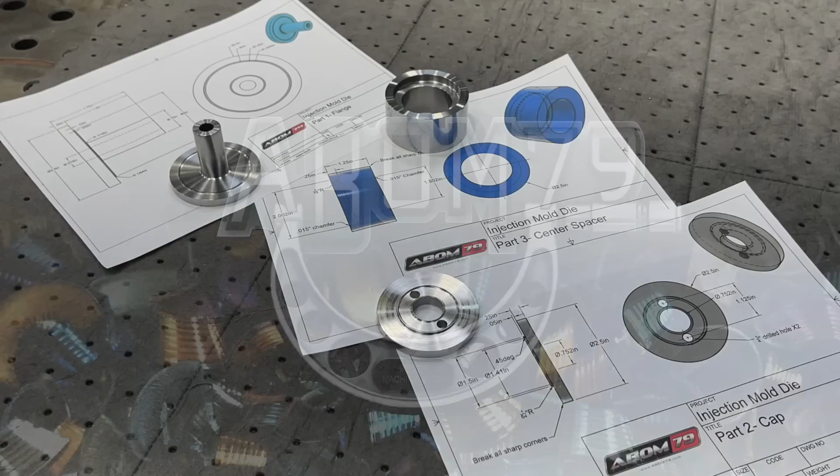Now that we have our first flange and stem piece for our first part completed, we'll move on to the second part, which is going to be the center spacer. I've got it listed as part 3, but it's just the next one in line I'm going to work on. This one will be fairly simple.

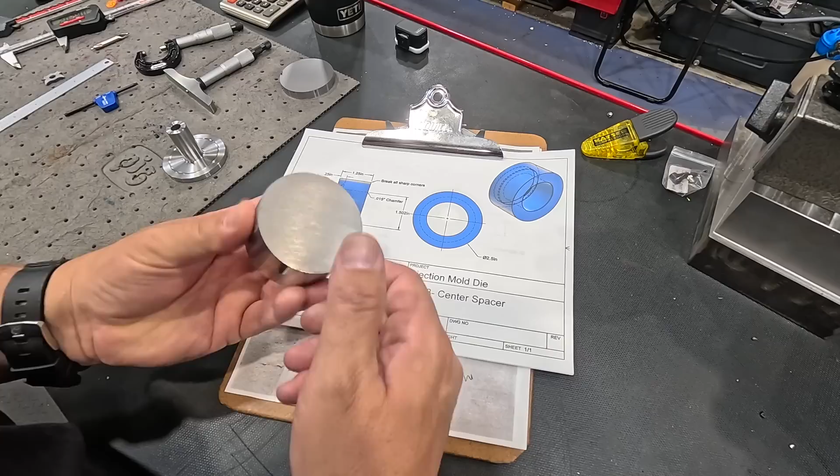We'll chuck it up in the 3-jaw, face it, drill it, counterbore it, and once we get all that finished, we'll flip it around, make sure it's trued up nice, face it to the correct length, and remove all the sharp edges.

All right, let's get this one machined now. We'll start by facing one side off. That's about 100 thousandths oversized, so we'll just touch off and take 50 thou. I'm going to go up to 900. There we go. 50 thou is always a good round face cut when you're trying to remove some material, at a 10 thou feed rate.

Now we'll go ahead and get our hole drilled through there. And now we'll knock that corner off while our tool post is where it's at, get rid of that sharp edge.

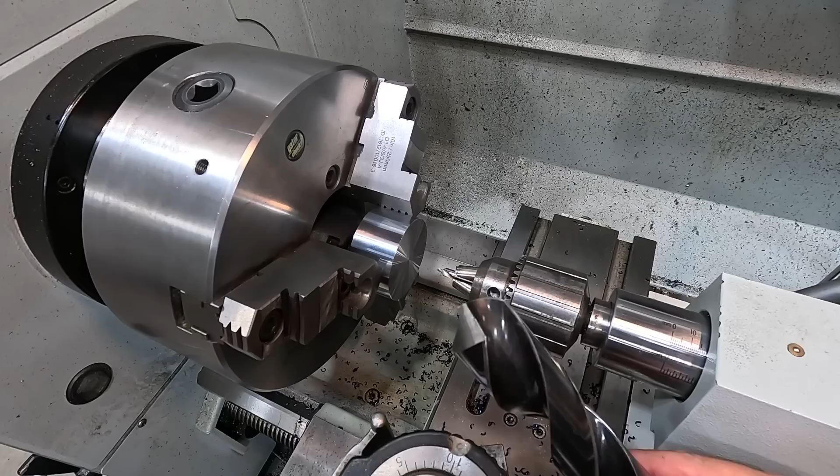For our drilling, we'll start with a center drill just to spot it, and then we're going to go in with a 1/2 inch split point drill. Then we'll follow in there with this 1 1/4 inch taper shank, put a 1 1/4 inch hole in there, and then we'll just bore it to our 1 1/2 inch size.

I think I'll go ahead and use our flood coolant for the drilling op, just to keep everything nice and cool and keep the cutting tools cool as well.

All right, let's see if we can do this without making a huge mess. That's one of the reasons why I don't always like using coolant over here on the lathe, but for drilling ops it's perfect, as long as you're not spinning the chuck too fast. I got it set at 340. See, even that is trying to sling it, and it gets all over the floor and the toolbox over here.

Let's see what we can do with that. I don't want to go any slower than that.

Drill's cutting beautifully, even on both sides. It just wants to make a mess. And it's over here on my print, dang it. Just use flood coolant, they say.

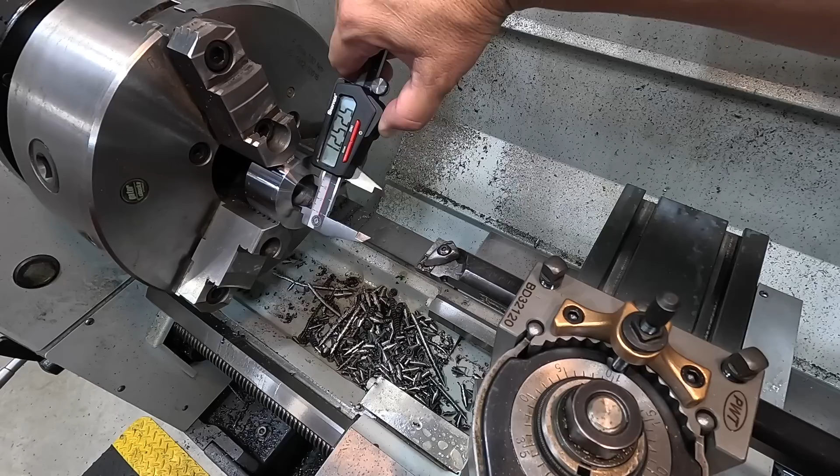All right, we got us a boring bar set up. Let's see what our hole size ended up being. I cut very true, look at that, 1.252, 253-ish. Nice, so we're going to bore that to 1.502.

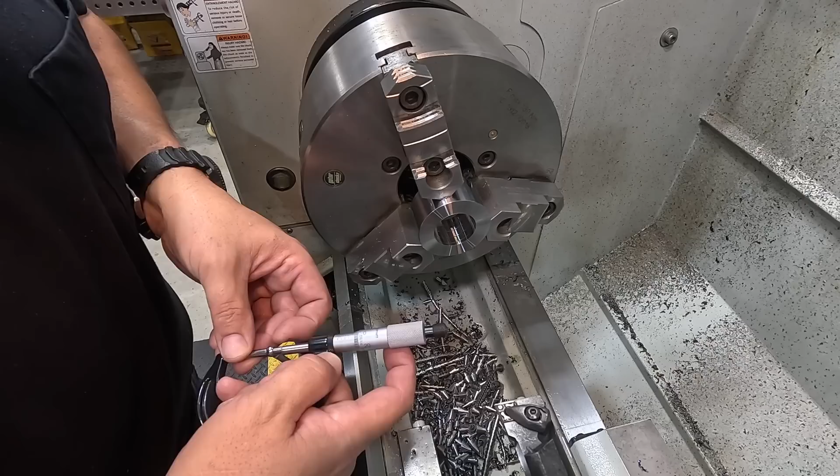Let's see if we're around 1 inch 452. 1 inch 450 and a half. All right, so we've got about 51 thousandths to come out of that.

So that should have been our finish pass. We got a nice finish in there. We sped that up to 900 RPM and ran a 5 thousandths feed rate on that. Let's go ahead and get us a measurement using our telescoping gauge. The target is 1.502, and let's see what we hit here.

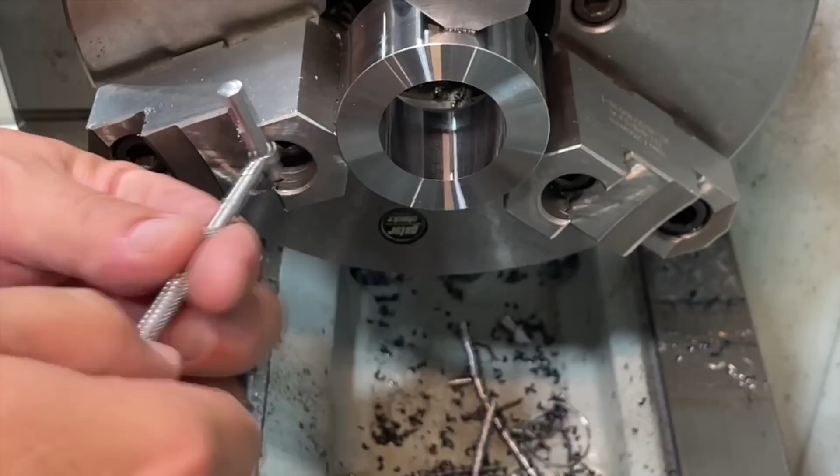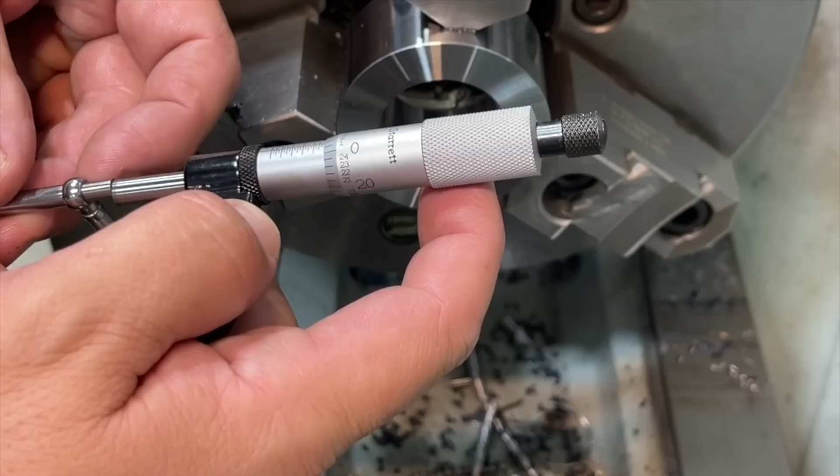All right, 1.501 and 5/10... .501 and a half. So I'm a half thousandth smaller than my target size, and there's nothing wrong with that. A half thousandths tolerance is well within the line of what we're shooting for here. So our bore is finished.

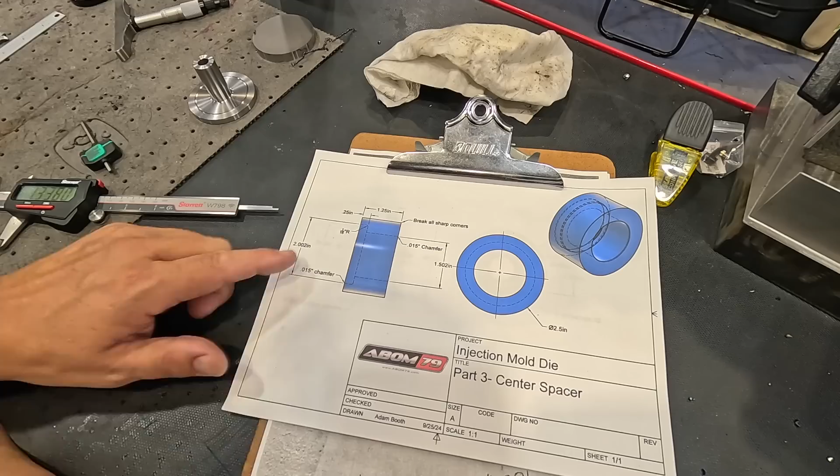Now we just need to do our counterbore. You can see we have a depth of 0.25, so a quarter inch deep, and a diameter of 2 inches and 2 thousandths. That is what's going to line up here on this little registered fit that we put on the first part, to line those two up together and make them fit good. So we want to try to hit our target there, 2 inches 2 thousandths, and the depth of 250 we'll be able to do no problem. So let's get that machined. Another really good use of our carriage indicator right here.

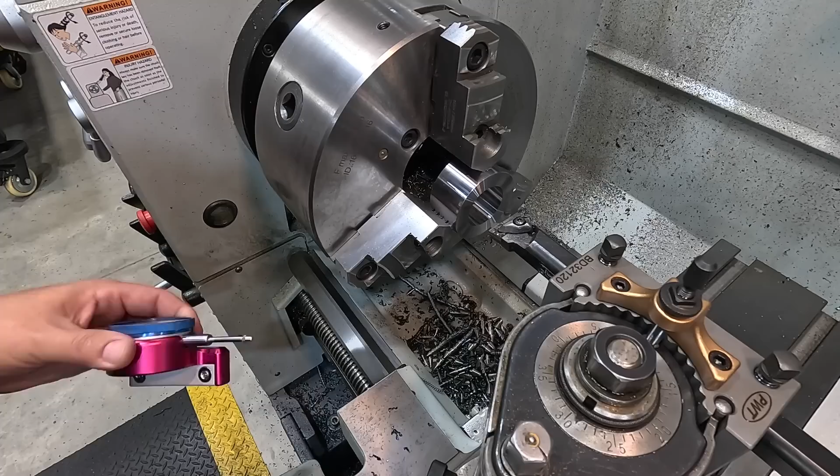You guys can pick these up from Edge Technology. You got some magnets, and when you stick them on the ways there, it keeps the stem of the indicator parallel in line with the travel.

And what we'll do is just set our stop there. So let's come on up with our boring bar. I'm going to get myself really close and just very lightly touch the tool to the face, and I'm going to set a 0 on my Z-axis DRO.

Now I want to come up. I can see how close I am. Just touching there.

And now we can go ahead and I'll just re-zero our DRO. We're going to go in there 240 thousandths, and then we're going to set this guy to our first 0. And the way it's clocked, I like it to come on around to about the 3 o'clock position.

You need to give yourself a little bit of run-in time, so when you see that needle start to move, you're not hurrying to stop it immediately. You want to be able to watch it come around to your 0. That gives us 10 thousandths to clean off that back face there.

It also allows you, so as this is coming up and feeding and you're approaching your 0, maybe you don't hit the lever just in the nick of time and you might go past it a little bit. That happens, it's very common that you might go past it a few thou. So that gives us 10 thousandths to clean that face up.

All right, so with that, I think we're ready to cut it. So I'm going to come in here and touch my bore, just go ahead and touch it right there, and I'm going to go ahead and zero out my X on the DRO and just start from a 0 point there.

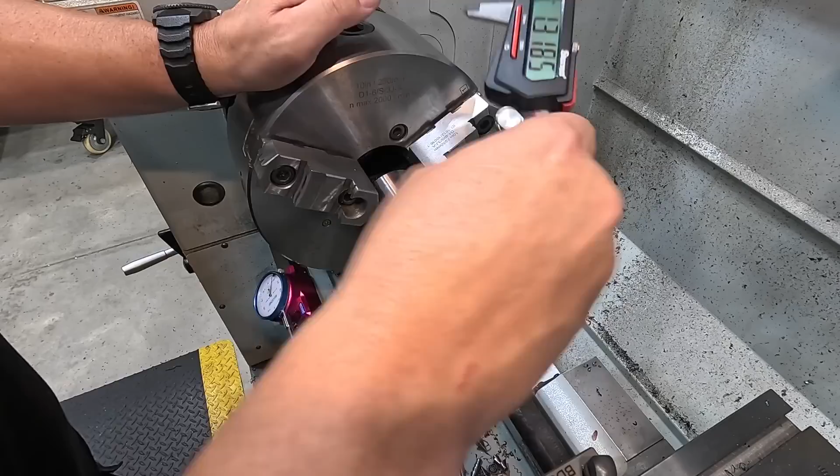So what I'll go ahead and do is finish doing what we're doing here and get our bore finished and get our radius machined in there, and then I can just face this off to the proper depth of 250 thou, and then that'll still give us enough room once we flip this around to just skin that other face clean. So I'm going to go ahead and swap this insert out.

What we're going to do is we're going to remove this insert here, which is a 431, and we're going to go in with a Walter insert, a 433 size. So that is about a 16th corner radius on the insert. It's a little smaller than what we actually have on our print, but we're going to use this because this is going to be fine for the radius that we want to put in that corner.

That'll be so whenever this is molded, the bushing, this corner right here on this insert will actually be the corner of the flange that gets molded in there, and that's going to work pretty good for that.

I'm going to go ahead and get that extra facing material out of there now. Not going to have good chip control with this big nosed insert.

All right, there we go. That's going to be our back face that we're going to go up to.

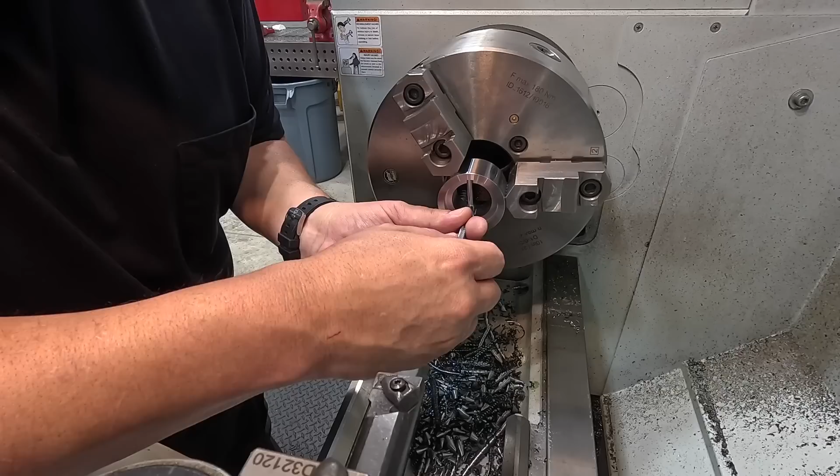I am going to use a telescope gauge here to check this. We have just enough material that we can get a good contact on both of the tips, and we should have about 7 or 8 thousandths, I believe, to come out of this. 996, so that's 5, 6 thousandths. I'm going to go ahead and double check that.

It's really easy to get it wrong. If you move that telescope gauge too much and don't stay dead top dead center, you need to have resistance whenever you come out of it so that it straightens itself up. I'll come back in here and check this again. Getting the same thing. 996 thousandths, 5 to 6 thousandths is what we want.

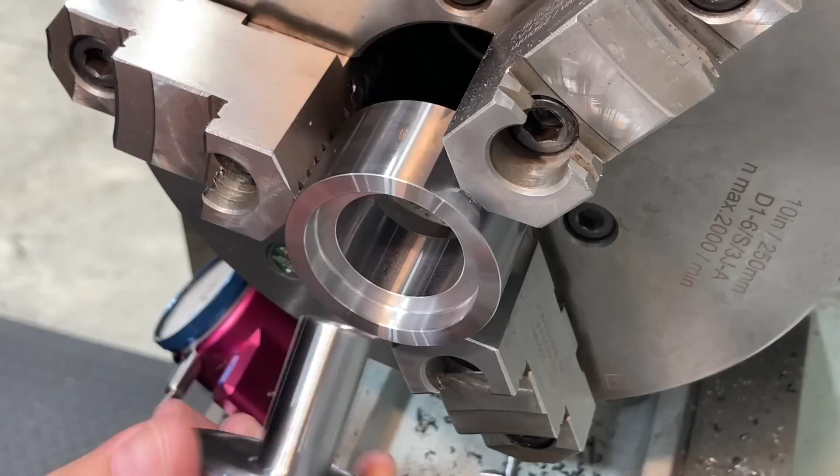I wanted just enough chamfer on that corner to clear the radius inside this little registered fit there, so it would seat all the way up to the face, and that's what we got. I can feel that couple thou clearance in there, and we have a good fit.

Once again, I was jumping ahead of myself here because I knew that I needed to face this off, but we chamfered it anyway. So we're going to have to come back and chamfer it because I need to take a little bit off of that. So we've got our depth mic here, and I'm just going to go ahead and get a read on it.

So we want this to be 250 thou. So right now, let's see, where's 250? There's 250. So there's 25 thou, 30, 35, 36, 37. So we need to take about 37 thousandths off of that face right now.

Just going to go ahead and work through this. Touching the face there, get a 0 up there. Let's get a 0 on our dial indicator. We'll just go ahead and take 25.

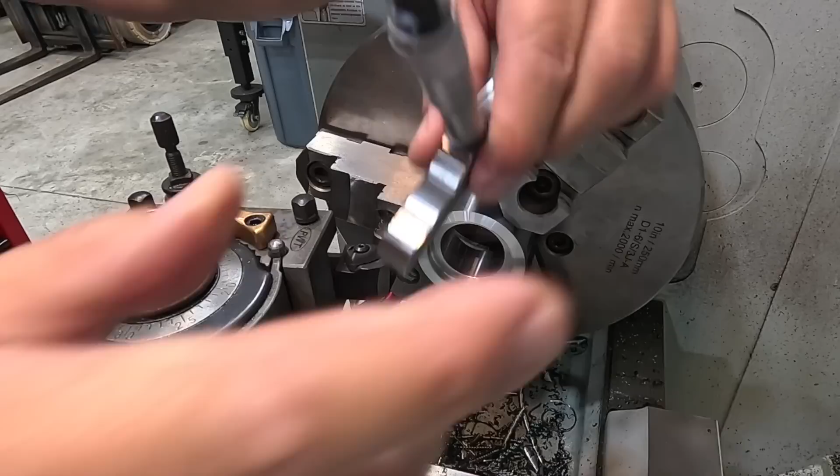Leave the tool right where it's at. Let's take another measurement and then take a finished cut. Get rid of those chips.

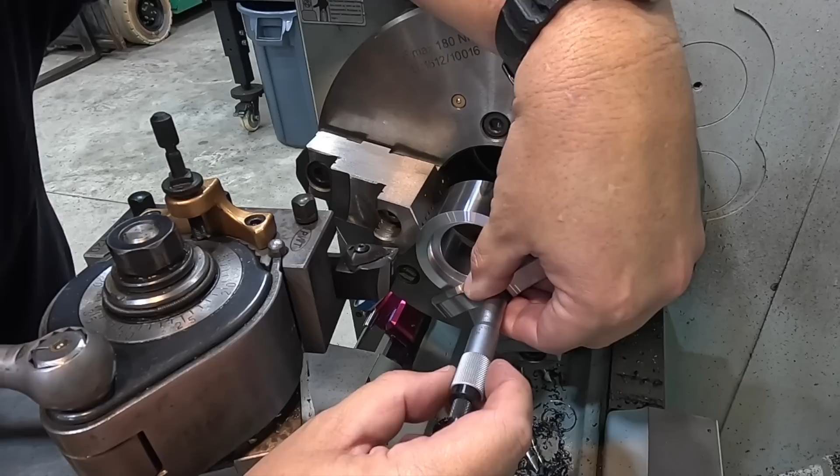It's about 14 and a half is where it's touching. 14 and a half. Okay, looking down here on this dial. 5, 10, 14 and a half. Let's see if that's it.

Again, let's just leave our tool right there. I don't want to drag it across the face, but I want to check this before we move it and see if we hit our target. I think we did. It's probably going to be just a little bit of material rolled over from that facing cut.

And we are 0.5 thousandths off of our depth right there, so we're going to leave it right where it's at. There's nothing wrong with that. And I'm going to go ahead and just re-chamfer that inside corner.

Already chamfered that inside. We're going to go ahead and hit this outside corner, break that sharp edge off of it, just like that. And what I'd like to do is take my Scotch-Brite.

Let's give it a nice little hit with some of this right here, just kind of polish it up. It always softens the edges and then makes the surface finish look a little more smooth and bright.

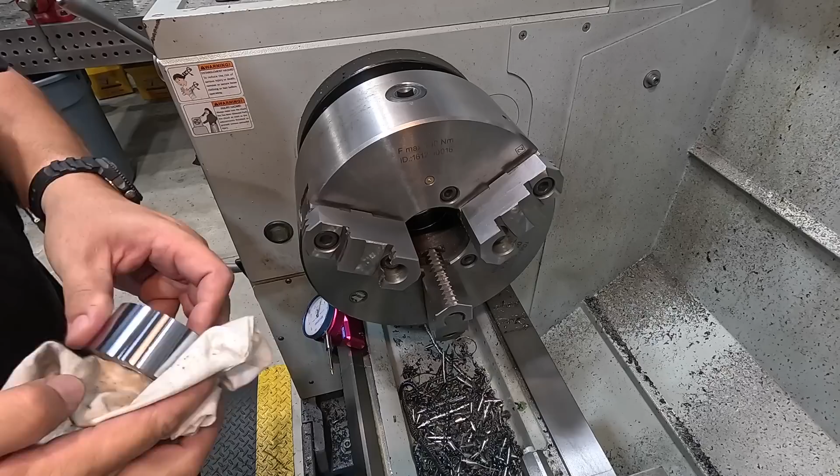See if we can get it in here and get us another measurement. Looks like 13, do it one more time. 13 thousandths, that's what we need.

Too much surface speed, not enough depth of cut. That's why it tried to roll that chip around. Luckily it did not scratch it, because that was my finished pass, but that's usually when it wants to do that, right? On your finished pass, not on the roughing passes.

Looks like we hit 250 on the nose. Nice. 250, all right, that is good to go. Only thing left now is that we need to put our chamfers on there. We just want to kind of break the outside, just kind of matching the other side. That looks good. And then we'll swap our tool and do the inside.

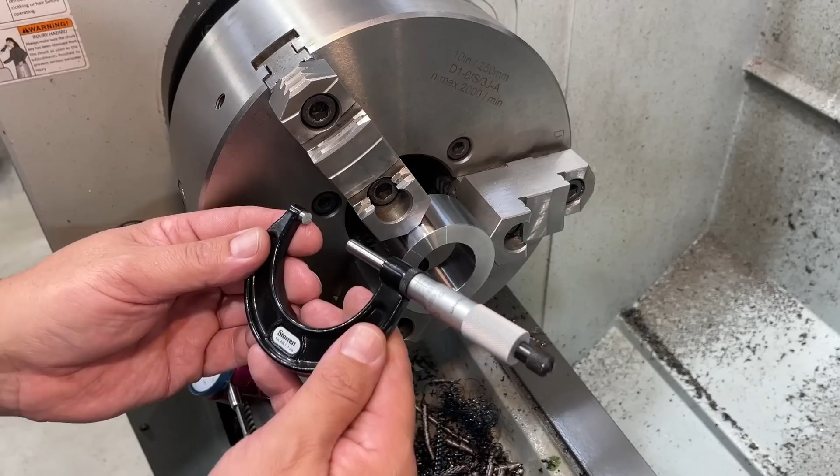All right, this guy is finished up. Let's get it out of the lathe.

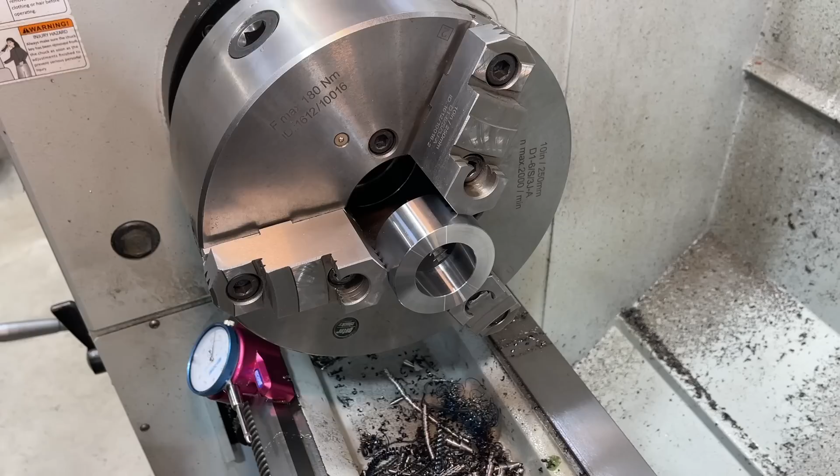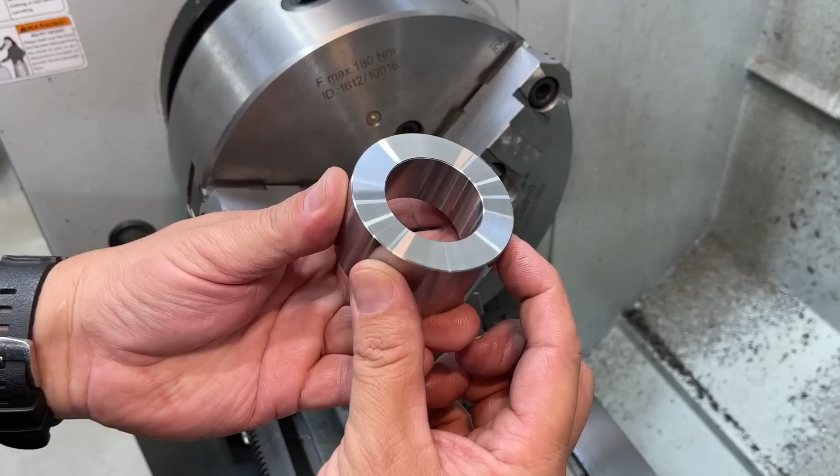Okay, so we've got the first and second pieces finished right there. Everything's turning out real nice, so now we have our third and final piece that we got to machine, and that's going to be the cap.

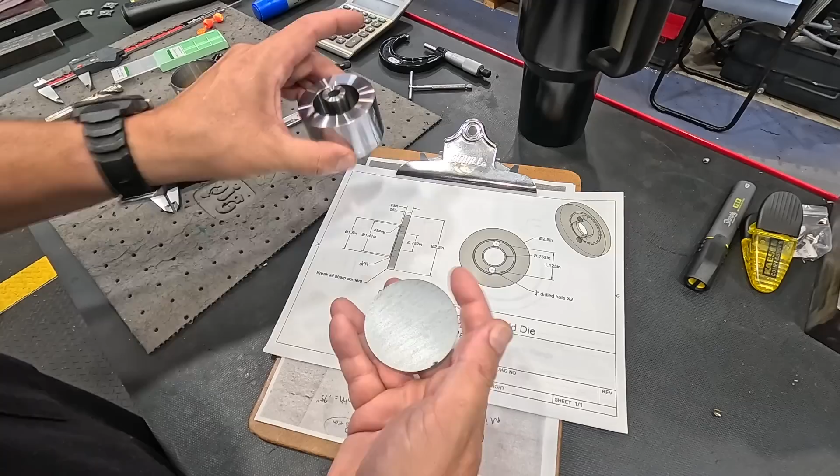So we'll take this disc over there and go ahead and start on it. This one's going to be fairly simple too. I think the trickiest part really is going to be just lining it up, which ain't going to be a problem. And one side has that registered fit so that it'll line up down inside this bore here. In the center of it is bored 0.752, giving about 2 thou clearance over this stem coming through there. We'll have a couple holes drilled in there as well. So once we're through the lathe work, we'll have to go to the mill and put a couple holes in it. So let's get back over on the lathe and get started on this guy now.

All right, so there's a few ways that you can put a thin disc in the chuck here and get it to run true. I think the trick that I'm gonna try here is to just get lucky, really. Usually when you have a good piece of material like this chrome plated rod, it's pretty true on the outside. So a lot of times you can actually feel the material squaring up on two of the jaws and just kind of hold it against those two and then snug it down. You can also, sometimes it might move a little bit when you go to chuck it because you're kind of pulling it one way or the other. If you just unchuck it and then let it settle on those two jaws, it'll kind of square itself back up. And we'll go ahead and snug it up.

Let's see how it's running. That's running perfectly true enough that we can get in here easily and face that guy, no problem at all. So we got lucky then, but we do need to make sure that it's tight because I didn't fully snug that up. So let's go back to our chuck and just go ahead and make sure all three pinions are snug. All right, and then we are ready to roll.

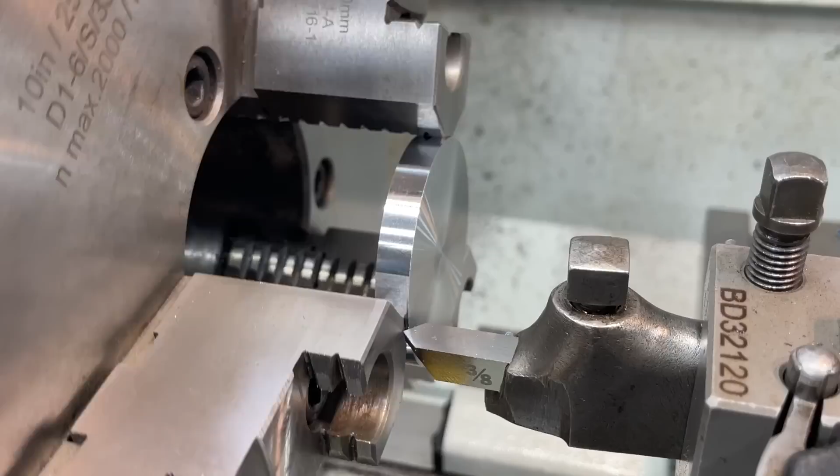So that material actually burned up the high speed, so I put a carbide tool in there. We're just cutting a chamfer on this. There we go.

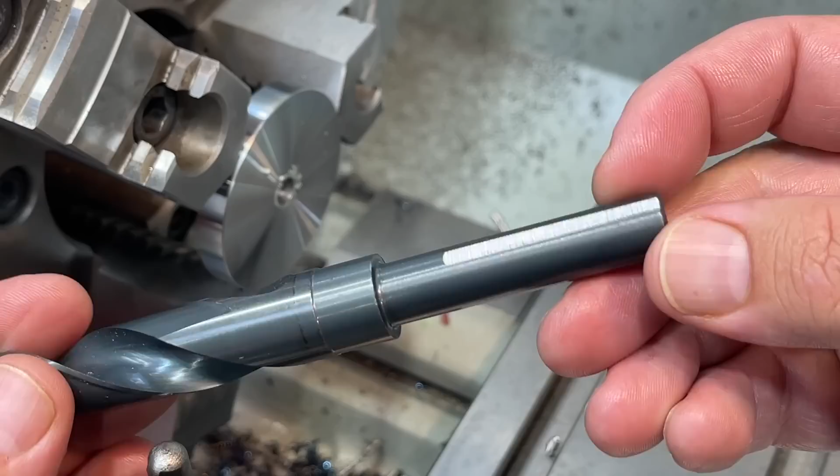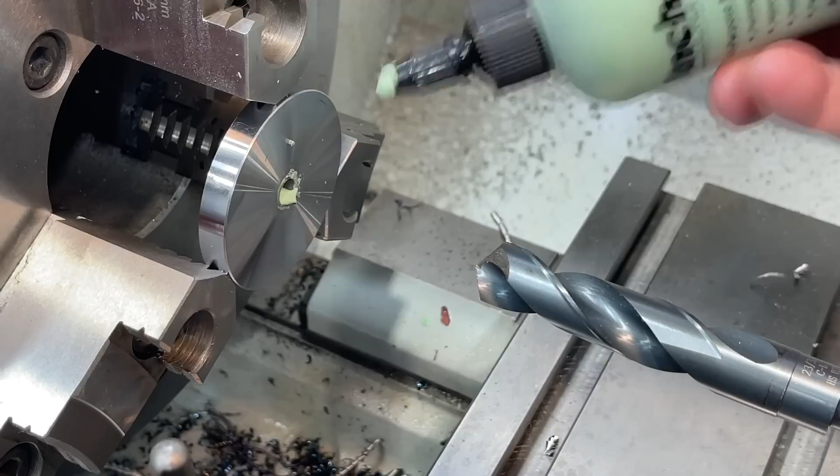So we got to make a 3/4 bore through there. We're going to drill it and then bore it to size. So we're going to go in there with this 23/32, this is my Chicago Latrobe. This one is still new. Should cut nice, it's got the 3 flats on it, so we ain't got to worry about it spinning. So we'll get this through there, and then we'll put up a little boring bar and get it bored to size. Using some of our anchor lube here for the little bit of drilling that we got to do. Put a little bit in the hole, a little bit on the drill here.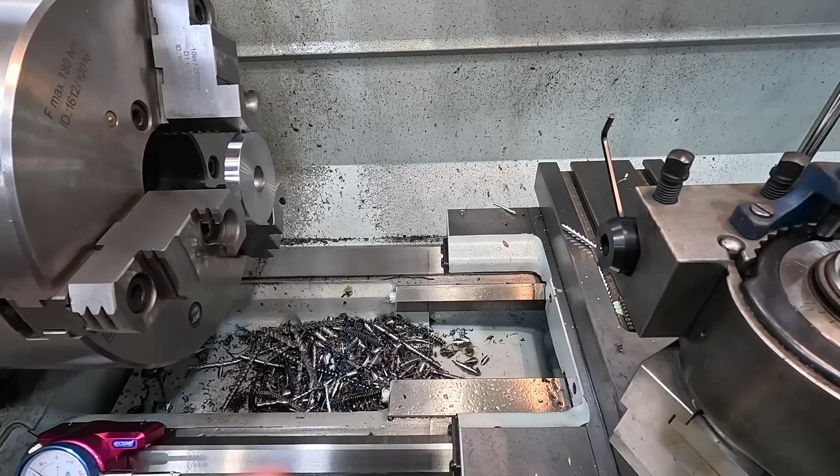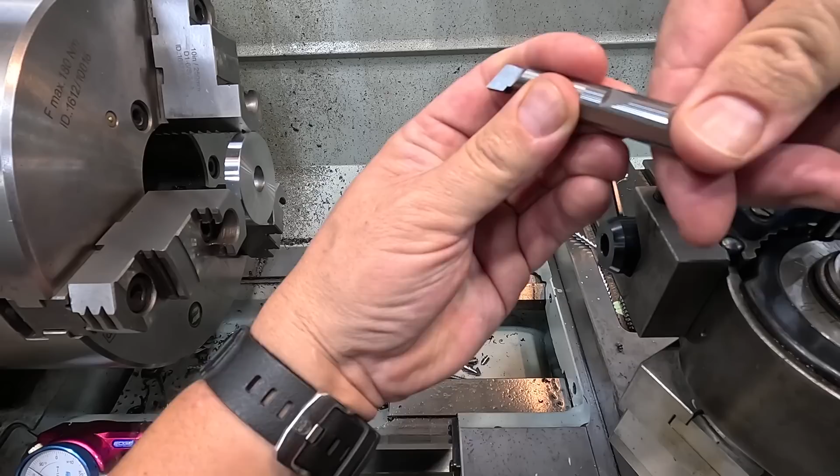I'm going to use my Micro 100 Micro Quick boring bar here to bore that to size. I love these little tools because the way they've got these made, you've got that angle ground on the back. Inside the holder, there's a pin that squares it up. So really all you have to do, you can see that notch on the top of it, is install it. If you get it straight, it's a very precision fit. You stick it in there and that pin is actually going to square up the end of the tool right where it should be. And you just tighten up that set screw, that's a conical shaped set screw that just locks it in and keeps it pushed back.

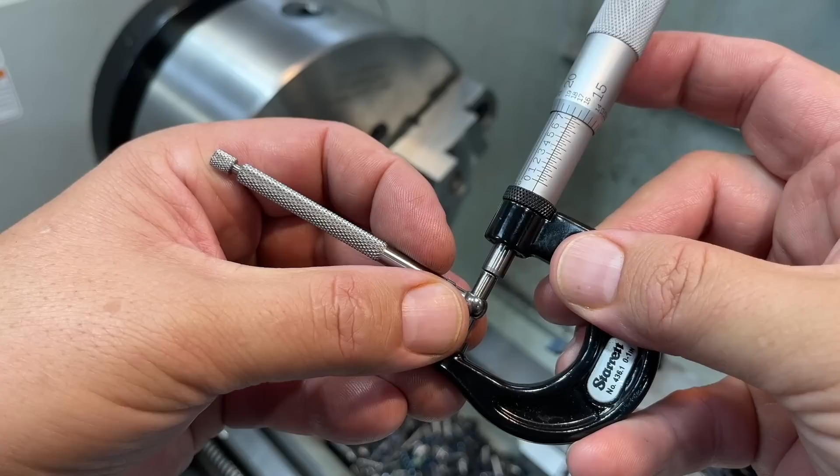Got 10 thousandths to come out of there. I just took 5 thousandths because I'm going to go ahead and mic that again and we'll make a finish cut.

Get a measurement, see what we landed on. That's looking really good. 752, maybe a tenth over. That's nice.

All right, so tell you what we'll do. We got our part, that's where it's gonna fit over. Let's check it. Yep, nice close fit on that, just like it needs to be. Nice, chamfer on that side will be finished up.

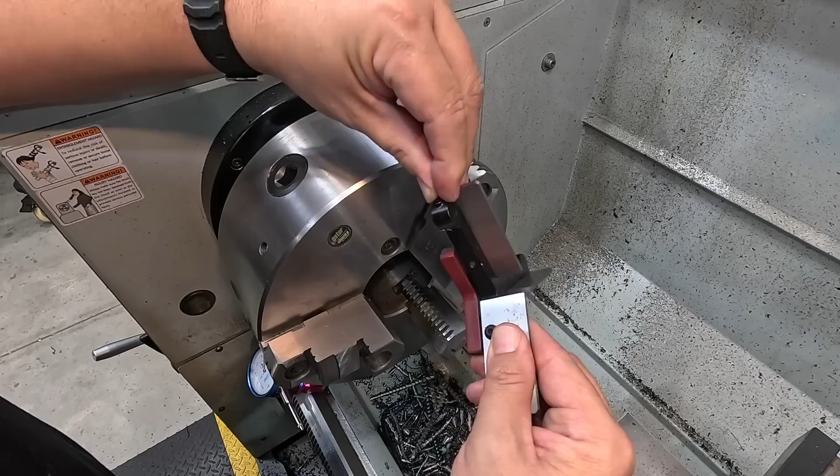And all they are is 3 parallels that's bolted to the spider, and they got some magnets back here. This is just a spacer to keep it centered in the chuck. And these are 1 1/8 inch tall. You can stick these guys on here like that.

Now the problem is that these aren't actually tall enough. And I have a set of the parallels, the tallest ones you can get is this guy right here. Let me see, 1 3/8 - I think that's - I'm sorry, 1 5/8.

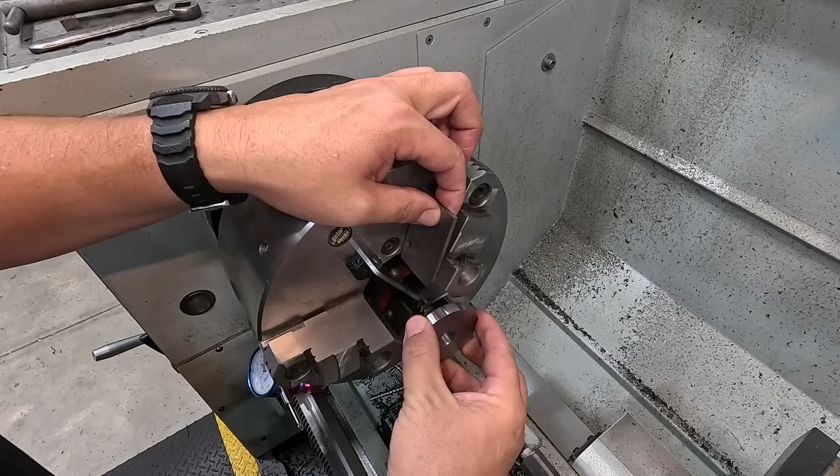So you can bolt that on there, but you see, we really only have a little bit that we need the chuck on because we need to face this to our proper thickness. And even going with the thickest parallel, it's still going to be up in there, so that's not working real well. So what we'll do is just find some parallels, or maybe even a 1-2-3 block or something. I need to get something in here that's going to shim it off of these parallels out to about right there. We really only want one notch of the 3 jaws to hold that, so we can get it faced off.

So where's my rule at? Let me get a measurement. I'm thinking one of my magnetic shim blocks from the Fireball. Yeah, so I think 1 inch will probably work to shim that out. So we'll try that. We'll put our little magnetic blocks here and see if we can push it up against it.

There we go, this is what I was looking for right here. And we could actually go in there a little bit further, but I think this is going to work right here. So let's go ahead and push that in.

And tighten up our chuck jaw. I wasn't on the pinion I wanted there. So that's got a good feel to it. It should be good to go.

We'll go ahead and pull these guys out, we're not going to leave them in there. This is going to stay in there, we can't get it out, but the magnets will hold it in place. So let's give this guy a spin up and see what we got.

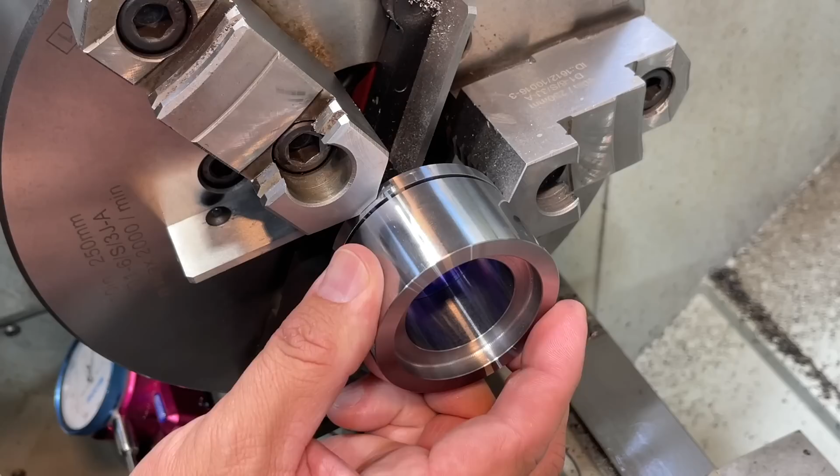So that fit right there is what lines up inside this piece. Got a good fit on that. So it should have about 2 thousandths clearance over that bore there.

So we're on to our last step here for our flange piece, and it's going to be very similar to what we did right here. We're going to use this 1/8 wide full radius insert, and we're going to plunge in 35 thousandths, and all I'm going to do is blend or cut all the way up right to the edge of both the bore and this registered step right there. But it's going to be just like what we did on our very first piece.

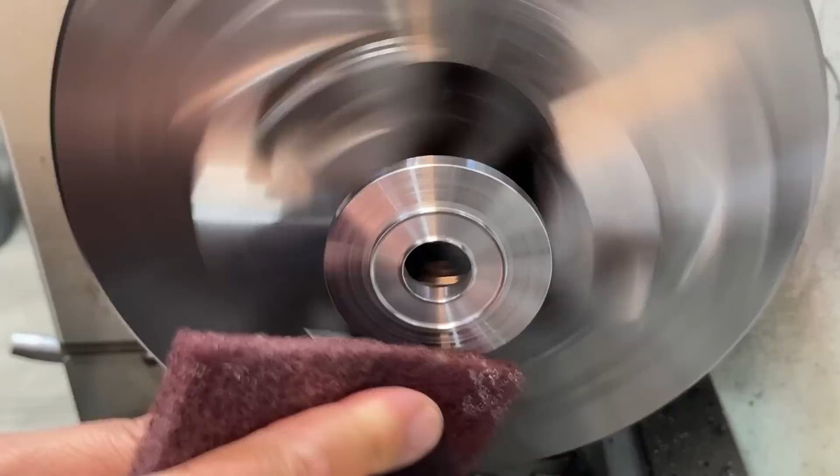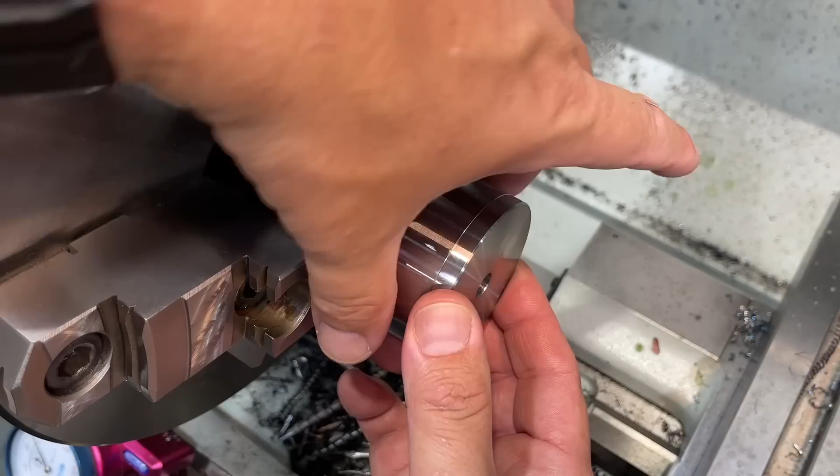Okay, we have all this polished up nicely, nice and soft, smooth, no sharp edges. All right, there is our flange piece. Here's our center bushing, sleeve. Fits on there nicely. There we go, look at that. Beautiful.

Our machine work in the lathe is wrapped up now. We'll go ahead and get it out of the chuck.

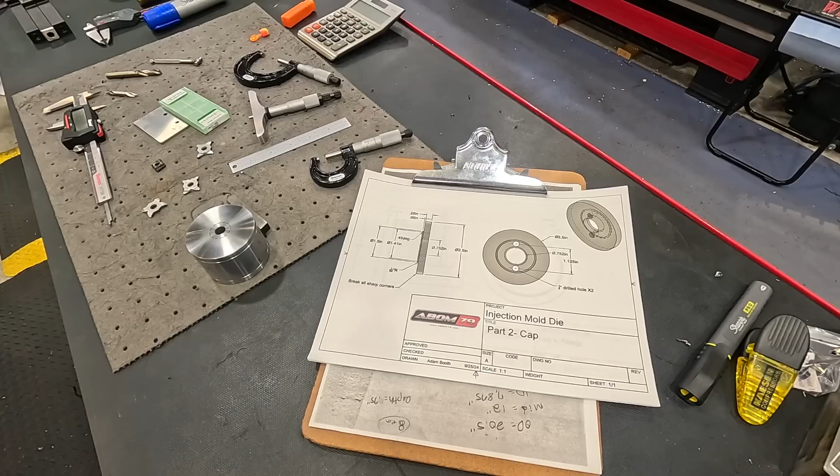We're getting into our home stretch, we're almost done. So the cap that we just finished here is nearly done. We just got these 2 holes to drill, so we have 2 1/4-inch holes on a 1.125 inch bolt circle diameter. So we'll go set up this in the KBC mill and go ahead and get those 2 holes drilled.

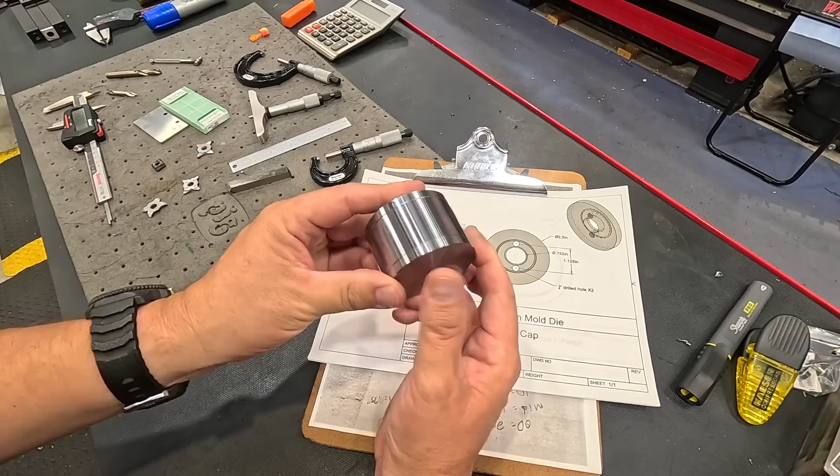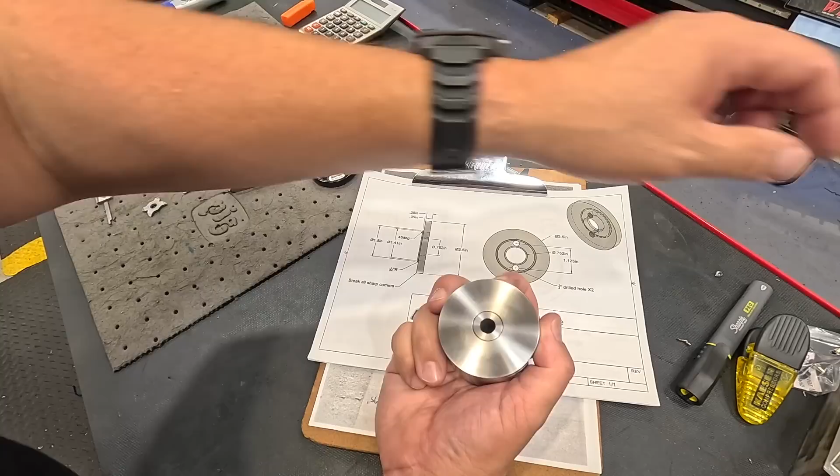So I'm liking the way everything is coming together, it's got a nice fit. I did manage to put a scratch on there from pulling out one of these magnetic blocks. Must have had a burr on it somewhere that I didn't check for, and whenever I pulled it out, one of those edges scratched it right there. That's unfortunate, but it's the size, so I've already tried to polish a little bit, so it's fine. It's just a cosmetic thing, but man, the fit is looking good on this guy right here.

So let's go to the mill, put our 2 holes in it, and that'll wrap up this job.

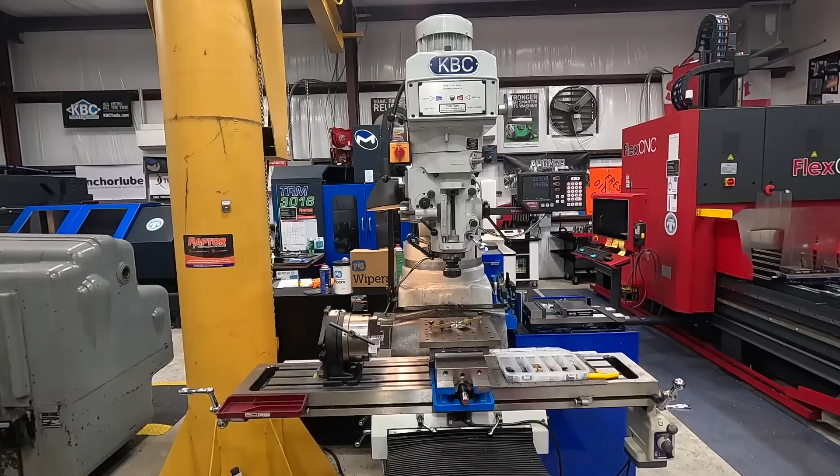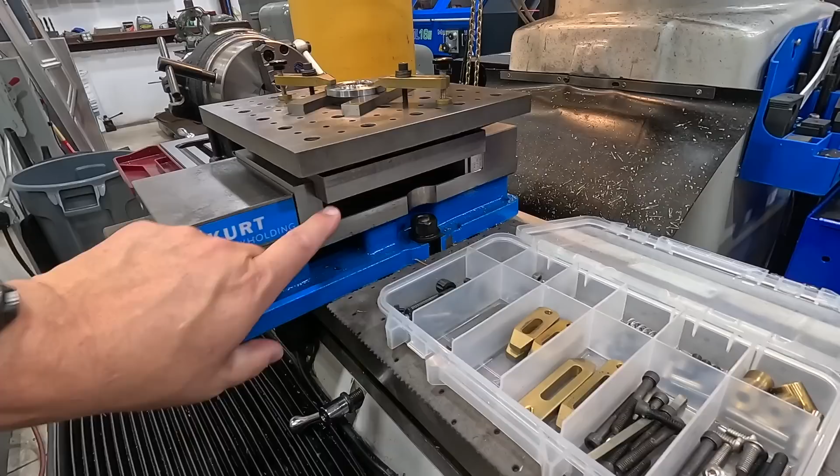All right, we got her set up in the KBC mill, and this is a perfect example of why I machined this fixture plate. This is one of the older, no longer being made Fireball Tool fixture plates, and I had machined this several years ago. This is a project that I put on the channel. I made a steel base plate for it, made for exactly things like this. So you can take this, clamp it in a mill vise, and be able to easily hold and secure and fasten down small or odd shaped parts.

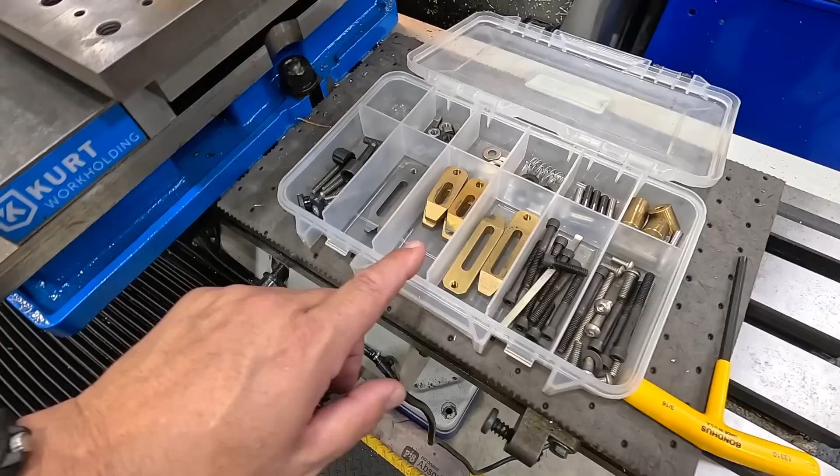Okay, so I got this little clamp kit right here, and this was actually made for me by one of my viewers, Paul Boulay out in Campbell, California. I believe he had made a few of these kits and sold them at the time. So this is several years back, but we got different strap clamps in there, studs, bolts, some pins.

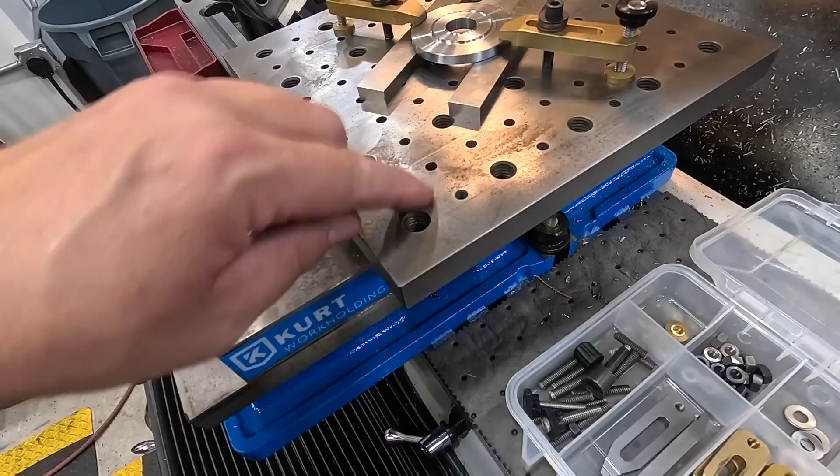I got some dowels in here because we have a 1/4-inch dowel reamed holes, which I've milled, so they need to be chamfered again. I've welded on this, so this was really mainly going to be sort of like a universal fixture for welding and machining. Last few jobs I've done on it, I welded. That's what the discoloration is.

But you've got plenty of thickness there, so really all you have to do occasionally, if you want to, is just deck it off maybe 5 thousandths with a face mill and clean it all up. It's a good idea to do that when you set it up in a machine, that way you know you got a good parallel surface there. But for drilling some holes, you don't really need to do that. But anyway, I love pulling this kit out and the fixture plate there and showing it to you while we're using it for our project.

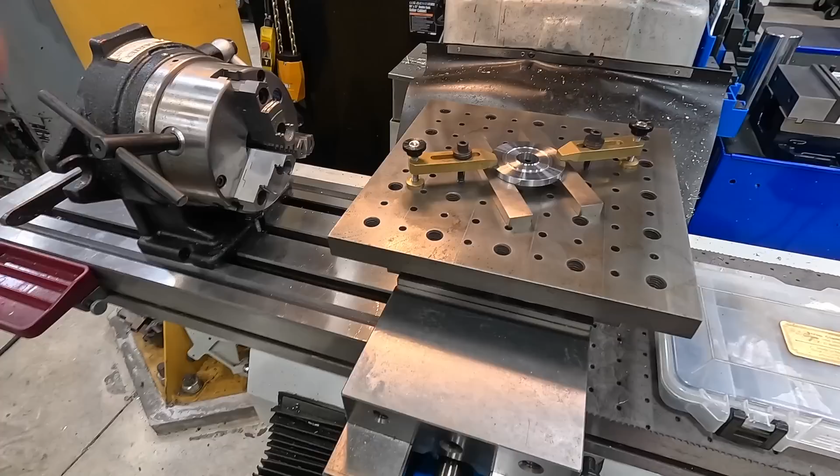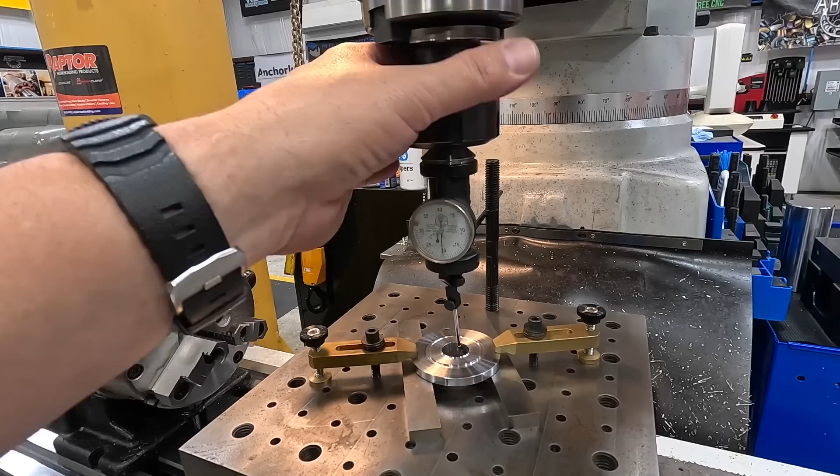So we are all set up to go. We'll get a coaxial indicator out, sweep that bore, and then all we got to do is drill our 2 holes. Okay, we got our Blake coaxial indicator set up here, got a stop rod back here to keep it from spinning, and all you got to do is just move your XY to line that up on 0.

I used a 1/4-inch spot drill and then a 1/4-inch split point drill to put the holes in. But the holes are so close to our radiuses right there, they come right up to the radius. So I don't want to put a chamfer tool down in there and cut into those radius, so we're just going to leave that alone. I'm going to try to very gently hand deburr those holes with a little Noga scraper.

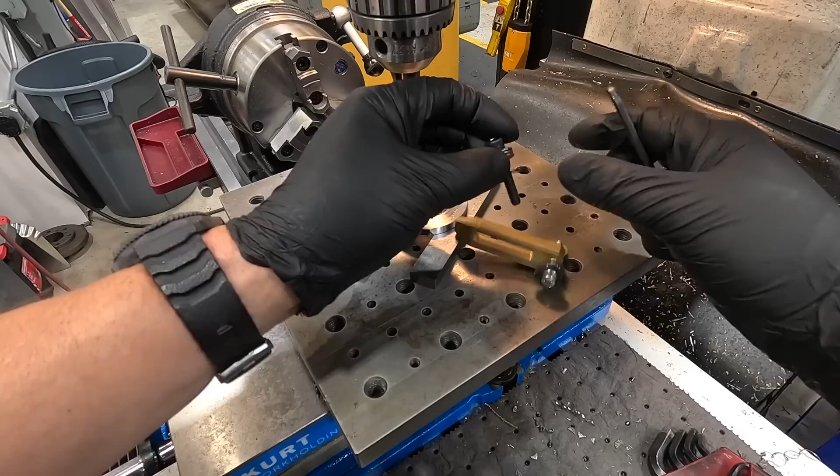So we're all finished up here in the mill. We're just going to go ahead and take it out now, just using our little Noga deburr tool there.

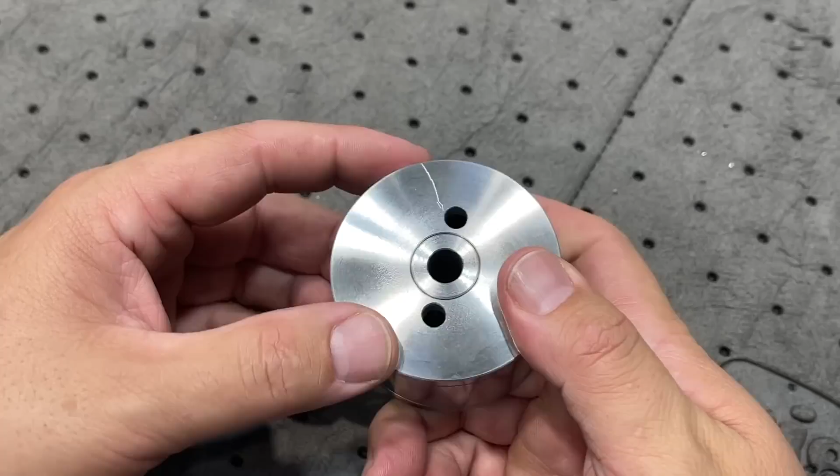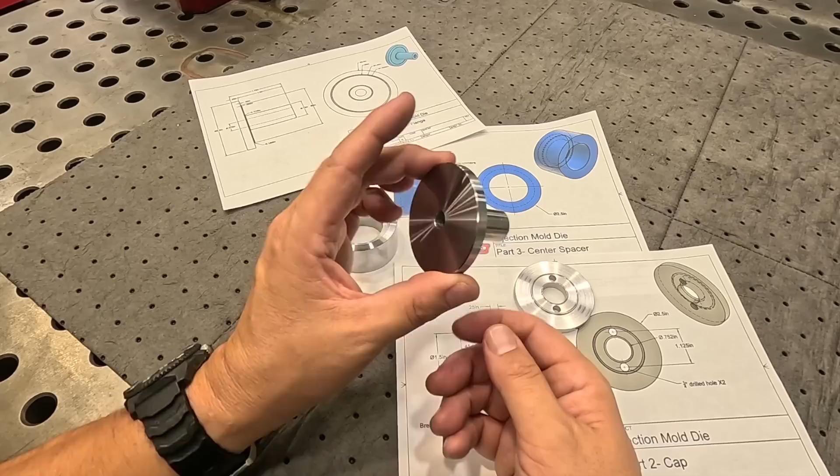All right guys, well this is going to wrap up this project. This is complete on my end, and it's ready to get packaged up and sent out there to Justin in Las Vegas. So we have our 3 components here: our cap, our center spacer right there, and then our flange and stem piece, that guy right there. I think it turned out good.

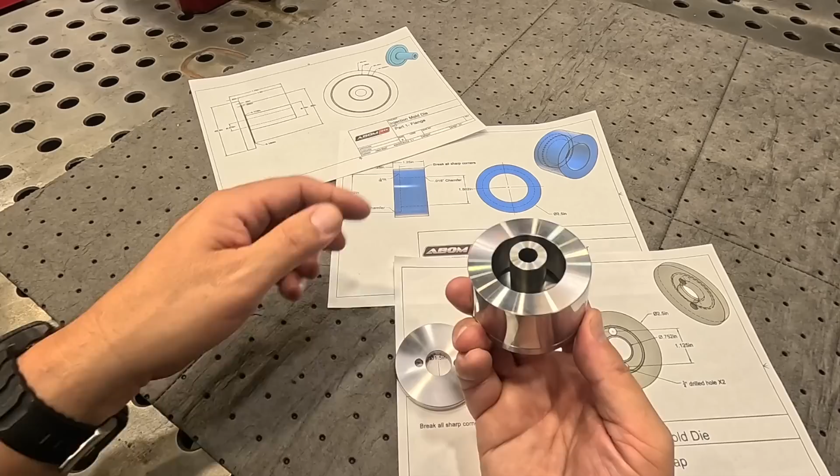I think it looks good, and I'm pretty sure that I hit all the tolerances well within what Justin was asking for on this. The only thing I don't like is that I got that scratch in it right there, but you can catch it with your fingernail, meaning it's probably 2 or 3 thousandths deep. You'd have to face that off to remove that scratch, but it's just a cosmetic thing. That's the outside, so it's not going to affect anything. But I really do like our fits that we got on here, a couple thousandths clearance on those little registered flanges, and that's going to work pretty good, I think.

Hopefully it will. So just to quickly go over how he was going to use this again: he said he's going to put a bolt through there. I guess he'll have to have a washer, maybe notch it to clear the 2 holes, but he's just going to use a bolt and a nut to hold the whole thing together. I think it's just going to be a bench setup just like that.

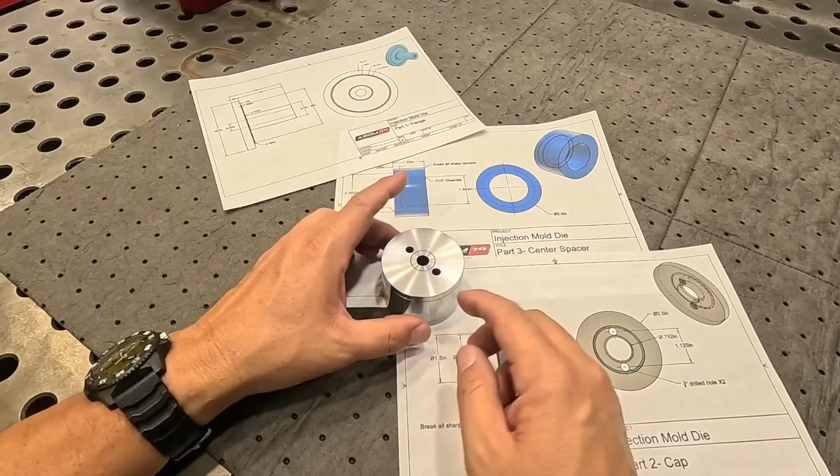He says there's some kind of syringe that's going to have the plastic material he's going to be using to make the bushing, and basically just inject it in those 2 holes right there until it comes out of that hole, and then let it solidify. And then once you do, you should be able to take this apart, take that off, and you should have a bushing sitting right there, a negative of this piece.

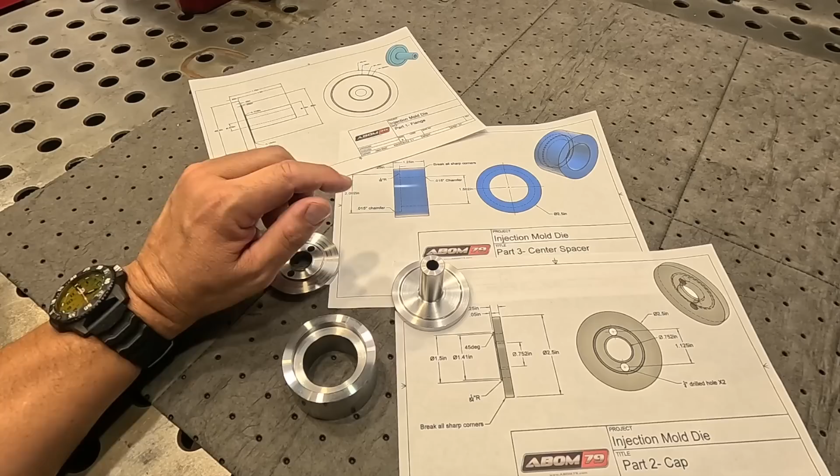I don't know the specific applications he's planning on using these bushings for, but I know he has some ideas, and this is just going to be a prototype for this size here. I believe that if this works out for him the way he wants, and it's something he can actually sell, he'll probably have some other sizes that he's going to want to come up with a mold like this for, for different size flange bushings.

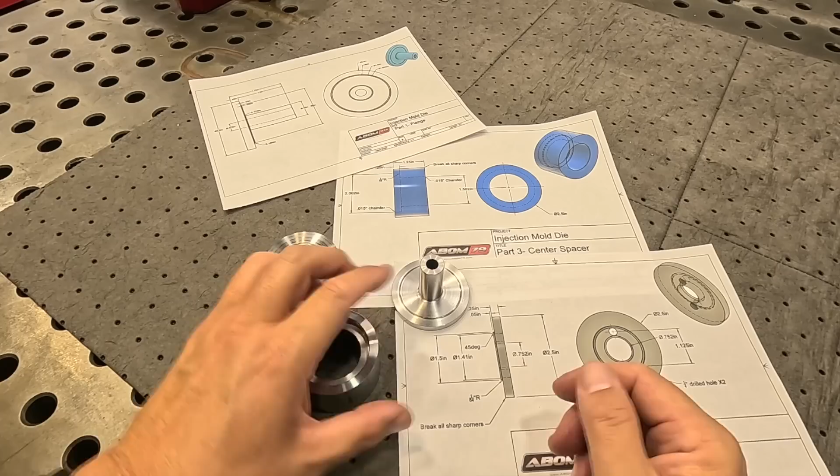So he'll probably be a little more specific as to what he's going to be using these bushings for, or what they can be used for, because it's supposed to be a universal application that you can buy for different fabrication jobs, things like that.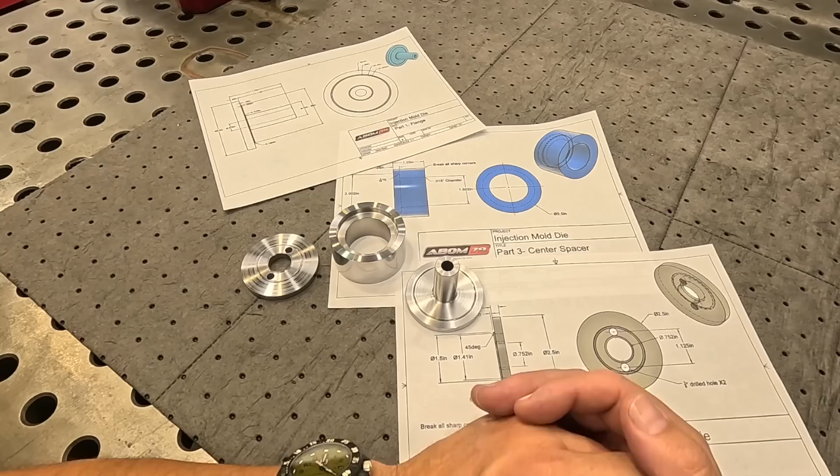So be sure to check him out. He's on YouTube and Instagram under the Fabrication Series. Great guy to know, I'm glad he's a friend. We talk every now and then just on shop stuff, projects, business, and things like that. Sometimes I'll text him and ask him how the world's going out there in Las Vegas, and we just kind of chit chat about stuff like that.

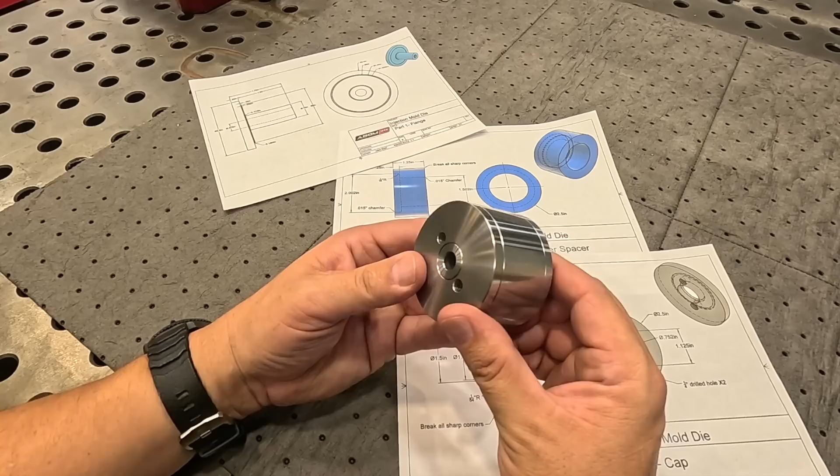But anyway, this job is done. I'm happy with it, I hope Justin likes it, and I hope you guys enjoyed watching the videos and following along with this project. Hopefully he'll have a follow-up on his end on actually making some bushings and the finished product once he gets his hands on this. So we're going to get this packaged up and send it out there to Las Vegas. I hope you guys enjoyed, and I hope to see you here on the next project. All right, see you then.